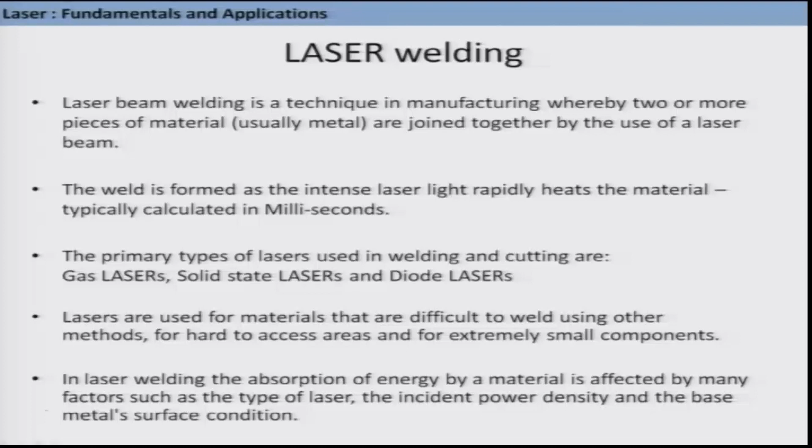In laser welding, the absorption of energy by a material is affected by many factors, such as the type of laser, the incident power density, and the surface condition of the base metal. Depending on that, one can achieve the efficiency of the welding by using laser.

Now as we know, laser output is optical, not electrical, right? So we don't need an electric current to flow into the metallic system which we need to weld, and this eliminates any possible effect of magnetism, and in this way we do not limit the welding process to only electrically conducting materials, which is the case in many conventional welding techniques.

And these lasers can interact with any material, they do not require a condition like vacuum, and they do not create some adverse rays either. This slide point is just repeated by mistake.

The laser beam has been used to weld carbon steels, high strength low alloy steels, aluminum, stainless steel, titanium, and various other materials. Now, though they have a lot of advantages, certain limitations are there. First, the rapid cooling rate may cause cracking in some materials, because you are using the laser for a short period of time. You create that heat in a very short moment, then the light is off, so there is no source of heat anymore. This rapid heating and then rapid cooling can create problems like generating cracks in the material.

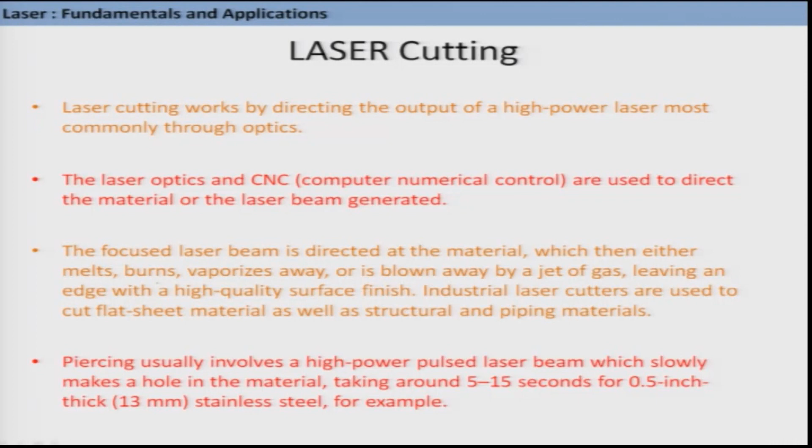You can also pierce through material, and this piercing usually involves very high power laser pulses which make a hole in the material, and making this hole takes anything between 5 to 15 seconds if you have a half-inch thick stainless steel, which is amazing, right? I mean, this is really a very short time if you think about it.

So here are some examples shown for this laser cutting and laser drilling. Here you can see that replica structures are being made, and this whole laser arm is computer controlled, and essentially you draw the structure that you want to make by cutting, say,

a sheet of metal, and then you program the motion of the laser head along with its optics, and then you turn it on, and the laser follows that program, cuts the metal, and just replicates everything ditto, and you can see that in all these pictures.

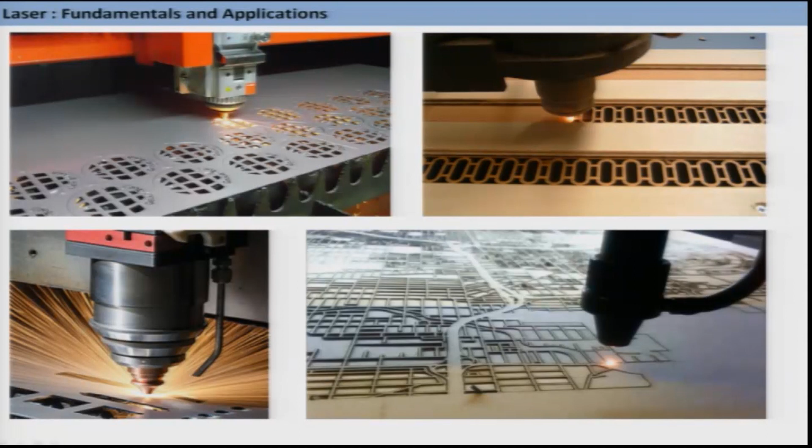Okay, and this image shows the laser cutting along with the cleaning of the debris that is formed during cutting, because it can ablate, it can vaporize, it can do several things. So a high flow of some inert gas at that region will blow things away, so that you get a clean surface at the end.

Now, what are the lasers that are used for laser cutting purposes? There are basically 3 different types of laser: carbon dioxide laser, neodymium laser, or neodymium YAG laser, that are used for either cutting or boring or engraving.

Okay. Now, what are the advantages of laser cutting over mechanical cutting? Some of them we have already discussed. Let us have a look at them again. So, it's easier to handle. You have less contamination on the piece of metal that you are working on. The precision is way better, because the laser beam does not wear during the process, unlike the machines.

So if you have a saw which you use to cut a metal sheet, during this process the saw is also getting damaged over time, and this is called the wearing process. But a laser light doesn't have this drawback, so it doesn't wear, and that is the reason you have much more precise cutting.

There is also a reduced chance of warping the material that is being cut, as the laser system has a small heat affected zone, because you are focusing to a very tiny spot. So in the range of microns, compared to a conventional machine, this is really small. So there is a very small region where the heat is created. This is restricted to a very narrow region, and that is why the chance of having warping is limited.

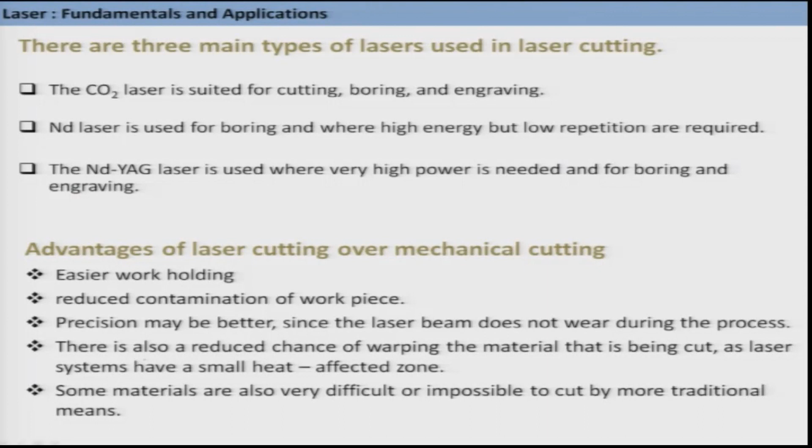Some materials are also very difficult or impossible to cut, just like we said in case of welding, and for those materials we can use laser cutting over the traditional saw cutting. One additional thing I would like to mention here is that laser cutting for metals has the advantage over plasma cutting because it can be more precise and use less energy when cutting sheet metal.

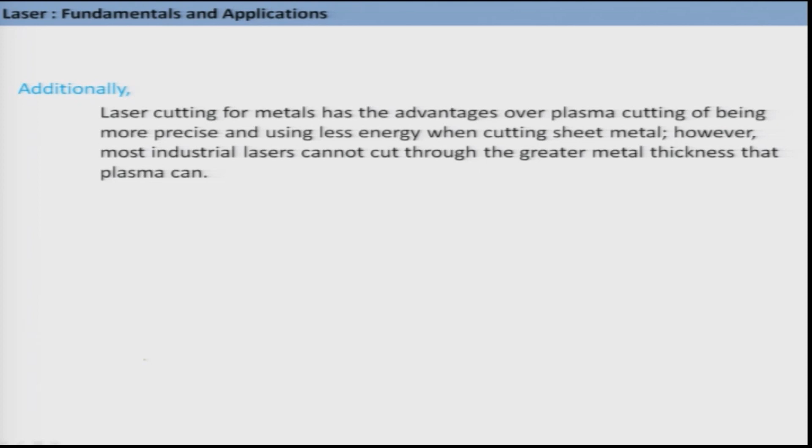However, most industrial lasers cannot cut through the greater metal thickness that plasma can. So if one is interested in cutting really thick metal sheets, then one may need to use a plasma cutting option, but other than that, everywhere laser cutting is superior compared to either plasma cutting or of course the conventional cutting techniques.

Next we will talk about laser cladding. Laser cladding or laser deposition is a processing technique that is used for adding one material to the surface of another in a controlled manner, and for this a stream of desired powder is fed into a focused laser beam as it is scanned across the target surface, leaving behind a deposited coating of the chosen material. So what it does essentially, this enables the applied material to be deposited onto the substrate surface, and not only that, you can deposit it in a very selective manner, wherever you want.

Additionally, you can again come with another material and deposit it on top of the first one. So you can have a very wide choice of different materials that can be deposited onto the previously deposited material. The deposits are fully fused to the substrate with little or no porosity, which is a big advantage.

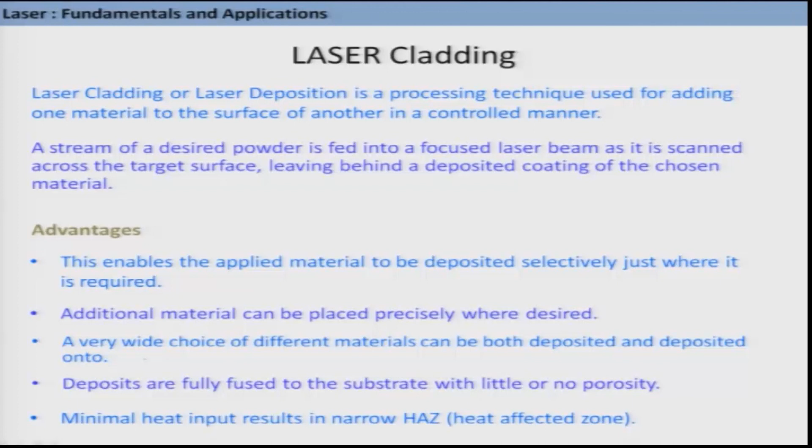The minimal heat input results in a narrow heat affected zone, which we already discussed in the case of laser cutting. Because of this narrow region of the focal spot, which in turn creates the minimal heat input, that results in limited distortion of the substrate and reduces the need for additional corrective machining. Certainly a big advantage.

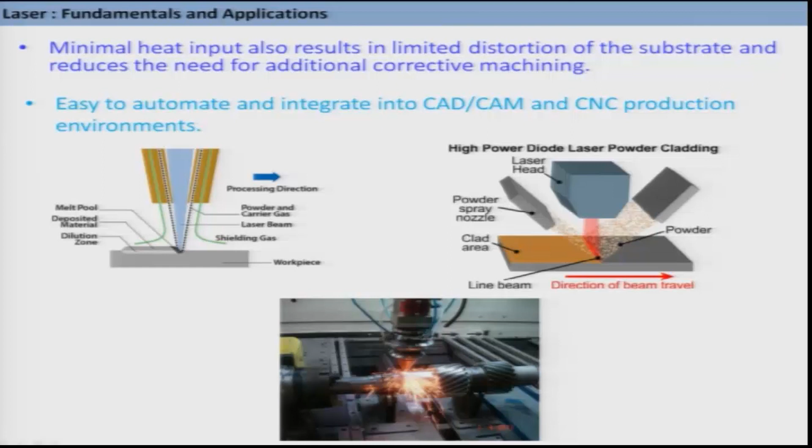Now, you can automate this process altogether using CAD or CAM and a computer controlled production environment. Here it is shown schematically how this cladding is done. You have a supplier of powder in the form of a spray, which goes to the surface, and there it meets the laser beam and gets deposited. So you can program exactly where these will be deposited.

Next we will talk about laser peening. Laser peening or laser shock peening is a surface engineering process used to impart beneficial residual stresses in material. In certain cases you need some residual stresses within the material, and using laser peening you can actually do that. The deep, high magnitude compressive residual stresses induced by laser peening increase the resistance of material to surface related failures such as fatigue, fretting fatigue and stress corrosion cracking.

So this is more like how having an impurity in a crystal can be better for certain systems. Here also, having some additional stress can be beneficial, as we said just a minute back. So what are the plus points? Laser peening enables the applied material to be deposited selectively, note this, just where it is required, pretty similar to the cladding that we discussed.

Fundamentally, laser peening can be accomplished with only two components, a transparent overlay and a high energy pulsed laser system. You can have a very wide choice of material, like laser cladding. The transparent overlay confines the plasma formed at the target surface by the laser beam, and it is also often beneficial to use a thin overlay opaque to the laser beam between the water overlay and the target surface.

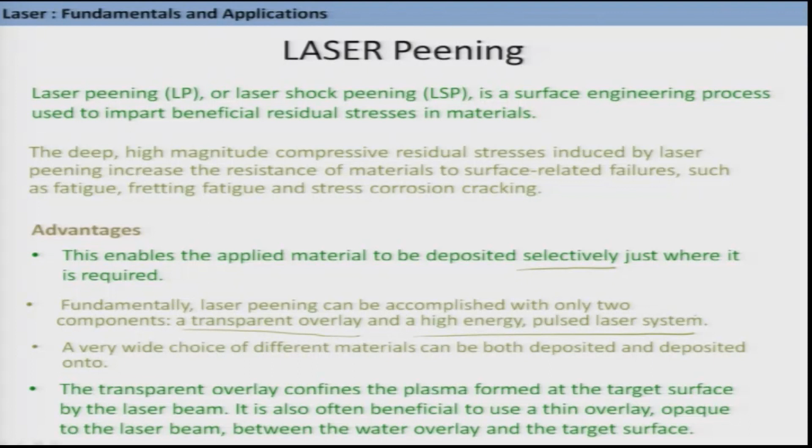Now, this opaque overlay can provide one or each of the following benefits. For example, it can protect the target surface from potentially detrimental thermal effects, which obviously you can expect from a laser beam. Second, it can provide a consistent surface for the laser beam material interaction. And third, if the overlay impedance is less than that of the target surface, an increase in the magnitude of the shock

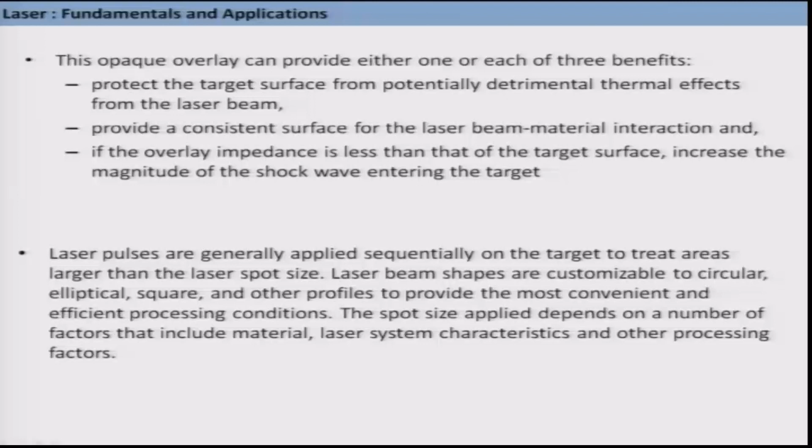wave entering the target. Now, laser pulses are generally applied sequentially on the target to treat areas larger than the laser spot size. It has to be, and the laser beam shapes are customizable to any shape like circular or elliptical or square, to provide the most convenient efficient processing condition.

Next, we will talk about laser surface engineering as the last topic in this section. Many of the most important topics in this field concern the treatment of semiconductor surfaces, and therein hold enormous potential for application in the manufacture of microelectronic devices. Many of us already know that the semiconductor industry has revolutionized the microelectronic device industry, and what we are going to talk about is of concern in those fields.

It is worth noting that excimer lasers in particular produce emission in a very useful wavelength, where photon energies are sufficient to break chemical bonds. We have seen that in the earlier case of biomedical application of lasers. So, excimer laser fundamental frequencies or their harmonics can break the chemical bonds in different compounds, and for us the important compounds are those which involve group 4 elements.

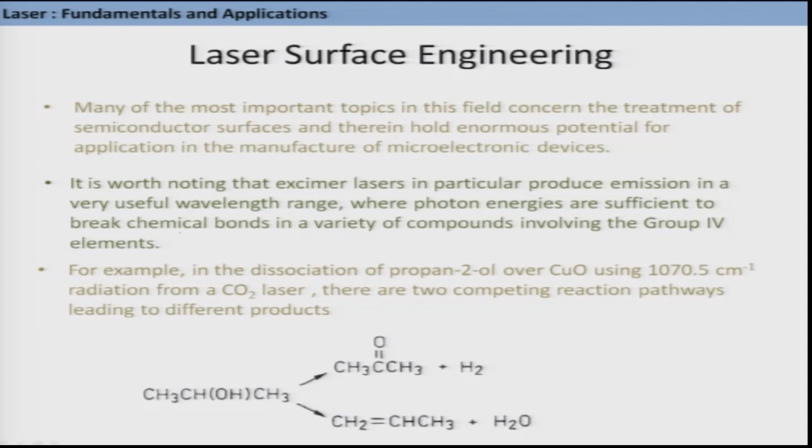For example, in the dissociation of propan-2-ol over copper oxide using 1070.5 centimeter inverse radiation from a carbon dioxide laser, there are two competing reaction pathways leading to different products. One is propanone, another is propene. The product ratio of propanone to propene can be varied from 0.02 to 6 depending on the orientation of the catalytic surface with respect to the laser beam.

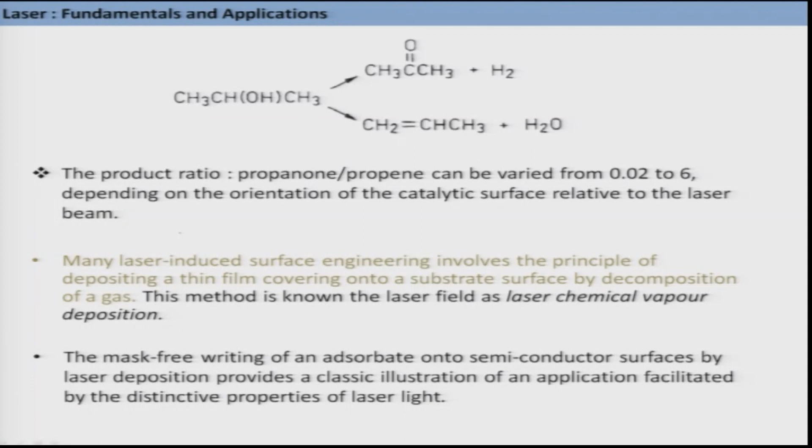Much laser induced surface engineering involves the principle of depositing a thin film covering onto a substrate surface by decomposition of a gas, and this process is well known as laser chemical vapor deposition. The mask free writing of an adsorbate onto semiconductor surfaces by laser deposition provides a classic illustration of an application facilitated by distinctive properties of laser light. The principle involved in deposition in this manner can be either pyrolytic or photolytic by nature.

Now, individually, the pyrolytic decomposition involves thermal reaction and is in general an indirect result of the surface heating produced by the laser radiation. For example, amorphous films of silicon can be pyrolytically deposited from a silicon hydride vapor onto quartz or various other surfaces irradiated at a wavelength of 10.59 micrometer from a carbon dioxide laser.

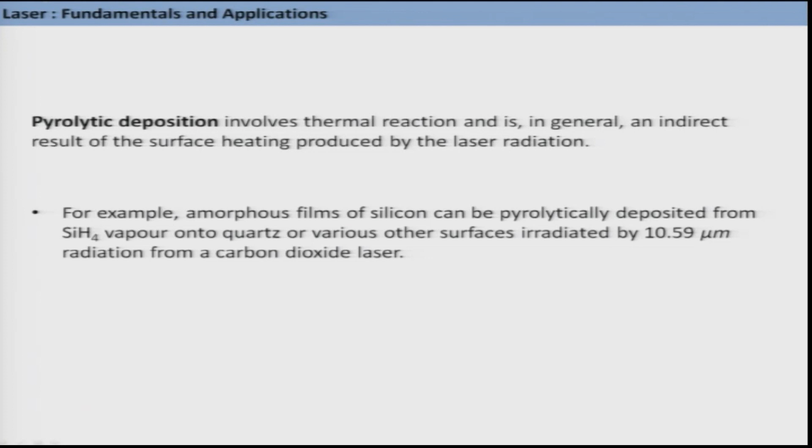On the other hand, photolytic deposition results directly from the absorption of laser light by the molecules of the vapor. Here we provide another example, which is realized by using 193 nanometer laser light from an excimer laser.

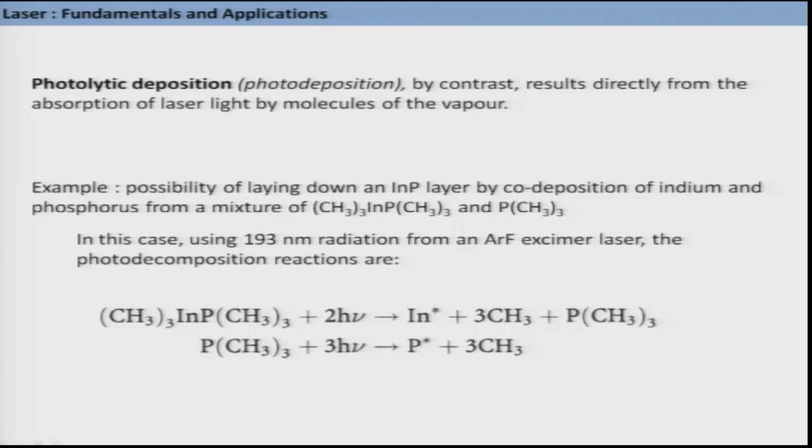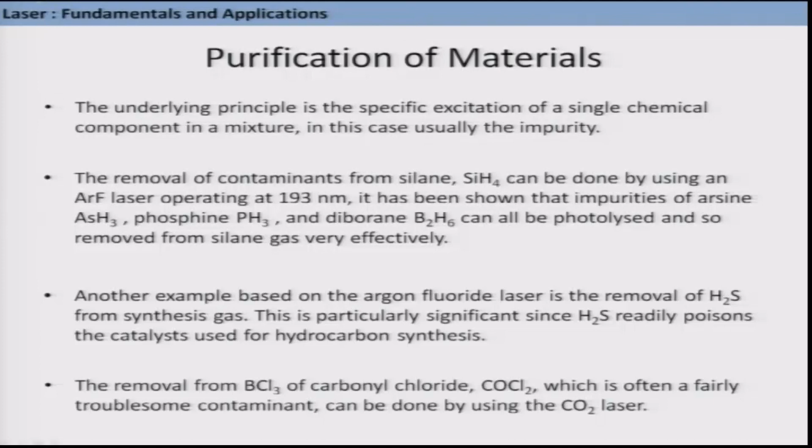We can also use laser radiation for purification of material, and here the underlying principle is the specific excitation of a single chemical component in a mixture, in this case usually the impurity. We have talked about this many times, when we discussed chemical applications and separation techniques like isotope separation. Here also it uses the same principle: the monochromaticity of laser light can be used to selectively excite one particular component, and then you get rid of that by some other means. So, essentially you can get rid of the impurities.

One more thing I will discuss here is the preparation of polymers, or in other words polymerization initiated by lasers. Normally pulsed UV radiation is employed to produce radicals for the process initiation, and it generally proves that there are substantial differences in the character of polymers obtained with laser radiation compared to those produced with radiation from conventional light sources.

One reason for this is that the high intensities associated with laser radiation can increase the transient concentration of radical intermediates and substantially increase the extent to which sequential absorption processes enter into the reaction.

Second reason can be that it is more directly connected to the pulse nature of the radiation, and the length, particularly the mean length of these polymers that are produced by this laser excitation, is essentially proportional to the dead time or the dark time, that is the time between two successive pulses. So, the product is characterized by a molecular weight distribution more directly amenable to control and generally quite different from the polymer produced using conventional photoinitiation.

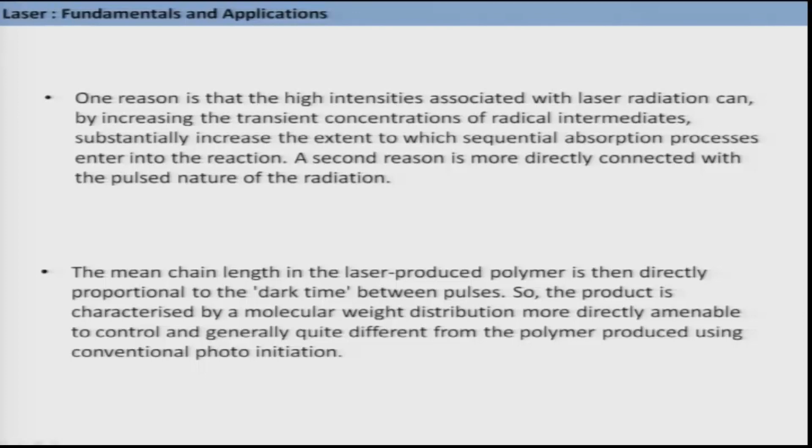So, in a pulsed laser system, since the dark time dictates the polymer chain length, you can actually control the molecular weight of the polymer produced by lasers in a much better way than what you obtain in the case of normal or conventional source initiated polymerization. So, with this we will stop this particular section, and we will move on to the other applications of lasers, particularly in the field of laser communications.

So, laser communication systems are normally wireless systems. Any communication system we think of is connected via some sort of connectors, like fiber optic cable, etc., but laser communication is like a direct communication without the need of any wired system. So, it is a wireless connection, and here the laser beam is used to transmit information between two locations: the source and the region where the signal is received. As I said, there is no fiber required because it is a wireless technology, and you can really achieve communication over very large distances.

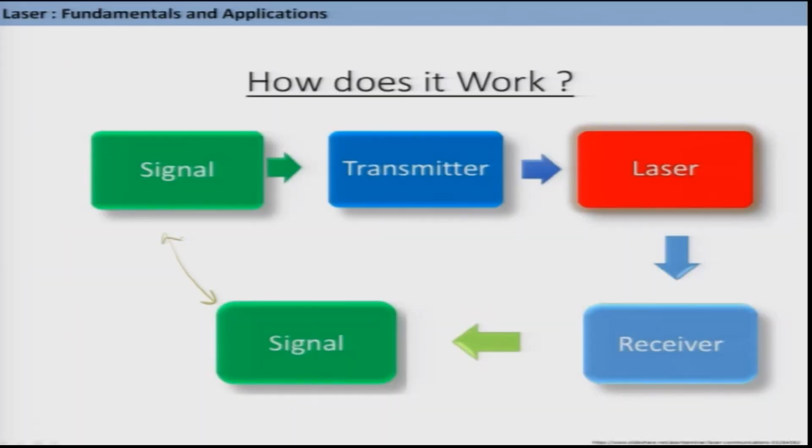Now, how does it work? So, here schematically, you have some signal we are giving to the laser through a transmitter, and then this laser beam goes to the receiver on the other end, which again generates a signal. So, between the two sources we can have the communication. One signal is sent to another place via this laser communication. This is exactly how it is done, as shown here.

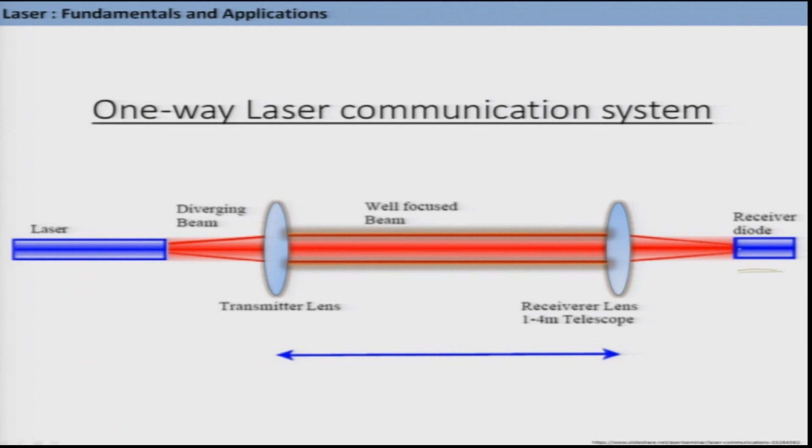So, this is a one-way communication system where you are using a receiver which can detect light, like a photodiode. So, you take the laser light, you collimate the beam, and then a second lens system, which is essentially a telescopic system. We already talked about this: if you want to collect signal from a far distance, you have to use a telescopic system. So, here you use a transmitter lens at the beginning, and then a telescopic lens system to collect that signal and then detect it. So, that will act as a receiver.

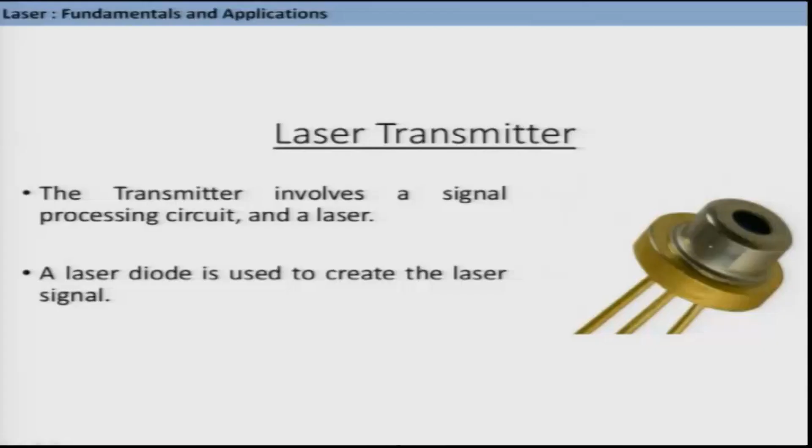All right. Now, first is the transmitter. For the transmitter, of course, you have to have a laser, and mostly laser diodes are used for this purpose. On the other hand, you have to receive on the other end, and the receiver can be some detector, like an antenna, like a telescope system, having a detector like a PIN diode or avalanche photodiode, or a PMT based detector or CCD based detector. They all can act as a receiver of this signal.

Now, in this communication system, we do not need any fiber. So, in which way is this better than fiber optic communication, and why don't you use fiber optics in the laser communication system? See, the problem is that it is not possible to put the fiber optic cable everywhere. If you are talking about communication between two planets, it is not possible to lay the fiber optic cable, right? And also, if you want to have communication where a war is going on, you place the fiber optic cable, and it goes in no time.

Okay. And if you want to lay these fiber optic cables, it can be really expensive, and suppose you need to have communication on an emergency basis, then you should have a means to do that, and that is where laser communication comes into play. So, essentially because fiber optic cable connectivity may not be possible in certain cases, or it may be expensive, wherever it is not possible, and wherever you can avoid having a fiber optic cable network, you can use a laser communication network system.

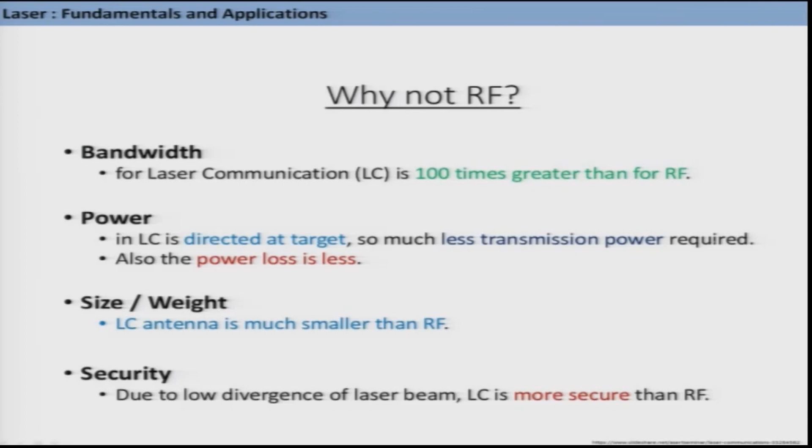So, in many cases if you want to transmit data which you want to keep really secured, you would need a system which doesn't diverge much, so that others cannot intercept it. So in that regard, laser communication is a far better option compared to RF communication system.

In industry, you have the communication between several components, several equipments, okay, and they are all tethered together to one main computer that controls all these communications.

You can also have applications of this laser communication in defense or other sensitive areas, at airports. So for communication across the runways where you would not like to have any kind of interruption, for mass communication, and of course for free space communication, like between planets.

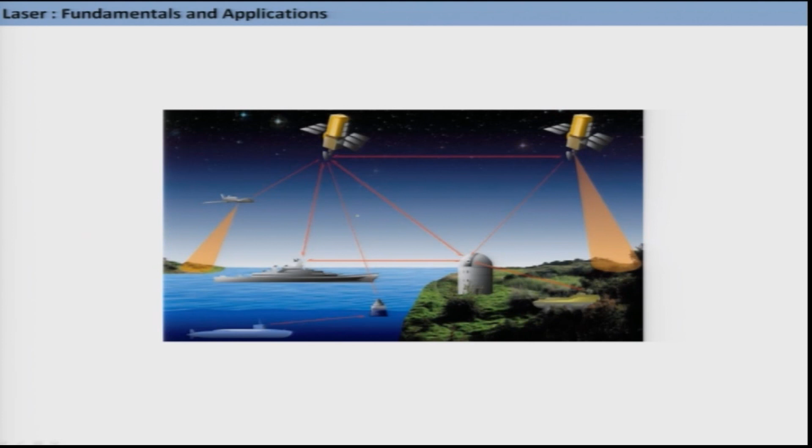So what are the security aspects? Free space laser communication systems have narrow optical beams which are not accessible unless viewing directly onto the transmission path, as I was saying. So less divergence, so very less chance of interception of that particular information that is being passed. So any potential eavesdropping will result in interruption of the data in transmission.

So if anyone tries to see this signal, they have to come into the beam path, and in that case your communication will be immediately gone. You will realize that okay, something is a problem. The existence of laser beams cannot be detected with a spectrum analyzer, which is a very big advantage, because it will not go and scatter like RF.

So what are the advantages? It is easy to deploy. You don't need a fiber optic cable or big receivers, etc. It can be used to power devices, and you don't have a problem of licensing. So license free long range operation, which is not possible in case of radio communication. You can have high bit rates, low bit error rates.

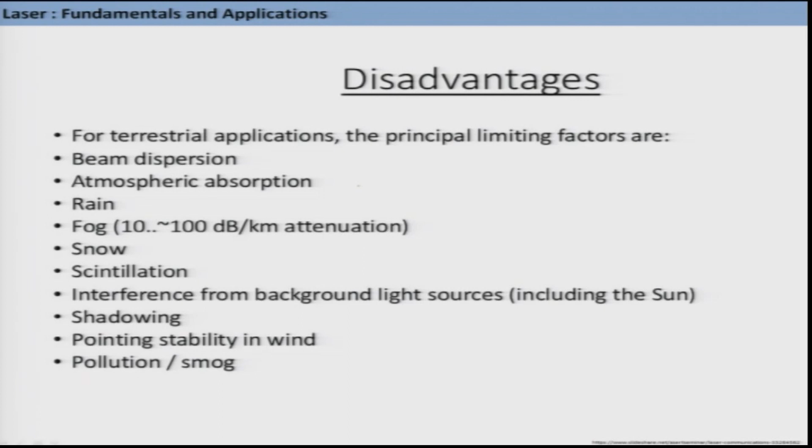No technique is free of disadvantages, and so is our laser communication process. So for terrestrial applications, the principal limiting factors are beam dispersion, atmospheric absorption, rain, fog, snow, scintillation, interference from background light sources like sunlight, shadowing, pointing stability, also pollution, smog. All of them would lead to loss of the laser light, and hence the communication will be disturbed.

But given these disadvantages, the advantages seem to be much better for laser communication over any other communication system. So, today what we have seen is that lasers have applications in various different sectors of medical sciences, and also just now we have seen that in optical communications lasers are being used, and those optical communications driven by lasers are being used in various different sectors of our life.

So, the next class will be the last class that we will be having in this course, and I will be talking about one very important aspect, which is laser safety.